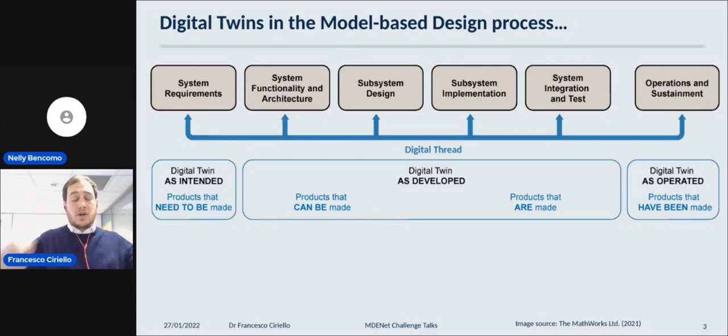The idea closely aligns to the sort of agile processes we're so familiar with for continuous improvement, which are commonplace in software engineering. What we were really keen on was stressing that operating digital twins in the field was the key mechanism to close the feedback loop between product cycles. So nothing too new about the philosophy here, but this is the framework we use to propose value for digital twins.

Once we had established a common grounding on the traditional view of model-driven engineering, we sought to map out opportunity areas for different emerging technologies. We started by examining the role of artificial intelligence at different stages of MBD, starting from the left-hand side, looking at unsupervised methods to mine data from previous life cycles of digital twins, and perhaps improve requirements and system architectures from this feedback.

We then moved towards the middle, looking at how AI can support data-driven modeling for SysID, for surrogate models and ROMs. We tried to get some of our learners to pick up basic skills that would support some of these workflows. Finally, we discussed how to use AI in operations in the deployment of AI-based listeners, for example in anomaly detection applications, or as agents for optimizing decision-making systems.

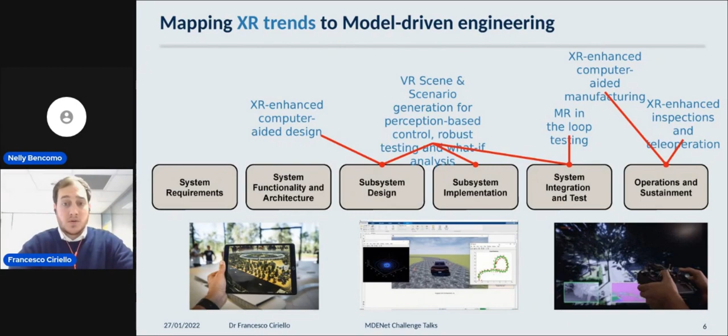So we created a case study to try and convey the roles of all these technologies in the course, and we tried to create practical components inside it too, that looked at multiple aspects of an enhanced MBD workflow. We examined how a team of engineers might design and operate a fleet of package delivery drones, which offered a good framework to develop simulation-driven algorithms for both design and operations.

Looking at motors, looking at battery health, looking at how to simulate faults in the copters, and even how to run reduced order models, say, for the aerodynamics of flight.

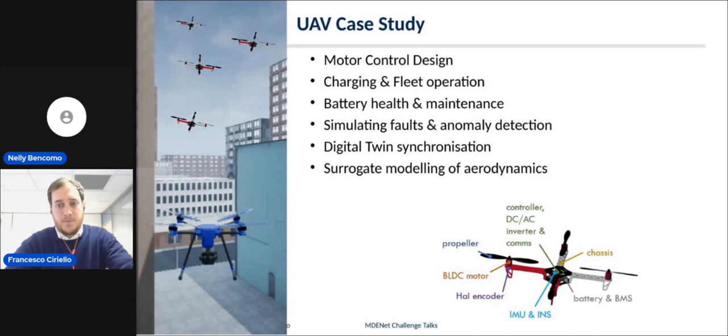We organized the case study by first exploring traditional themes in model-driven engineering. On the top line, you can see how we started looking at design of experiments, reusing models for operational decision-making, and also some techniques showing how to synchronize a digital twin model by assessing the condition of an asset from streaming data. These are really cornerstones of digital twin practice that we wanted our learners to get some practice with.

We then moved on to show how the boundaries between model and physical asset fade in a sort of modern DevOps. We looked at how to use simulation to generate edge cases, for example motor faults, and use data to improve or generate models through system identification or parameter estimation techniques.

In the second day of the course, we started looking at emerging technologies, starting from AI and delving deeper into data-driven modeling, then looking at how AI can be used in decision-making systems—that's the operational intelligence on the slide. But for the final part of the course, we focus on building interfaces and engineering use cases for XR software. So for the rest of the talk, I'll focus on these technologies, as they are less commonly explored in engineering practice.

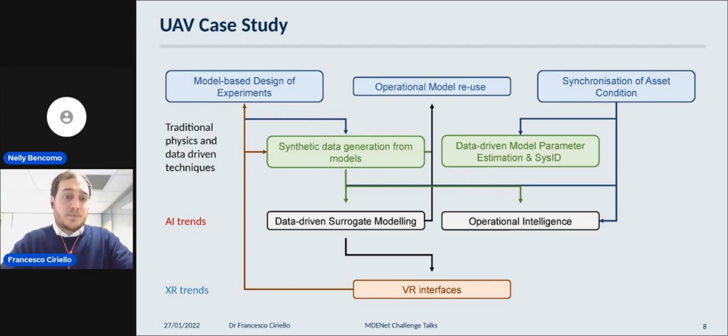The main tension that became apparent as we started delivering the course was that we typically model systems with a whole spectrum of fidelity. On one end, we were developing simulations in engineering IDEs like MATLAB and Simulink to show some of the workflows. On the other end, we also wanted to deploy some of those simulations into platforms such as Unity and Unreal to take advantage of a wealth of features that come with photorealistic simulators.

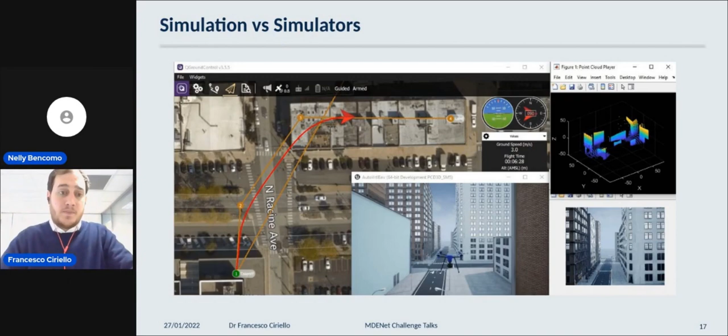This is an interesting schematic that resulted from our attempts to first explain game engine technology to engineers, and then map it to model-based engineering workflows. If a game developer designs a new virtual world, they'll first build their players and environment as objects in a gaming engine. On top of that, they define dynamic elements such as skeletons or articulations to start modeling the interactions between them. These filter through a series of animations, kinematic or dynamic models, or event triggers to create richer interactions between the virtual world and the actors or players, which are rendered through some kind of engine.

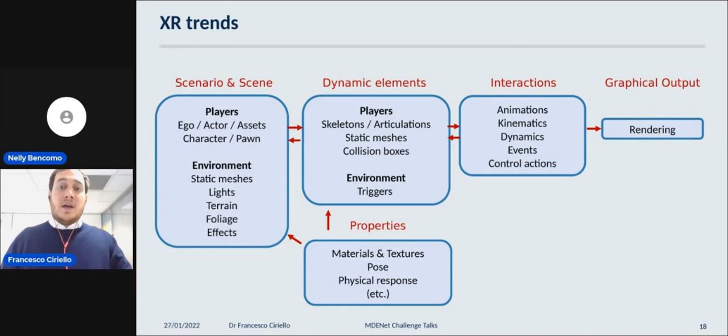Now we're seeing more engineers practice similar workflows. This is how we try to map these elements into the engineering world, starting from the creation of assets in CAD, where we might build actors—CAD models of, say, pumps, cars, drones, and so on. These actors are built into assemblies, typically in some proprietary language within a CAD package that defines the joints and their relative positions. Then we have to import these into a gaming engine with tools like Unreal Datasmith or Unity Pixyz.

These scenarios and physics would be primarily driven by simulations. So we had to think about how to build interfaces between realistic physical simulations and these XR technologies, which have much faster physics but lower fidelity.

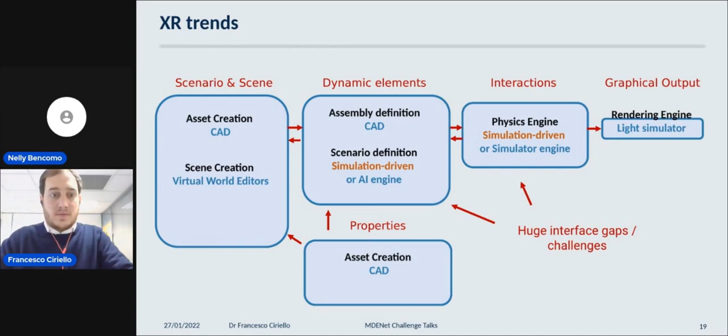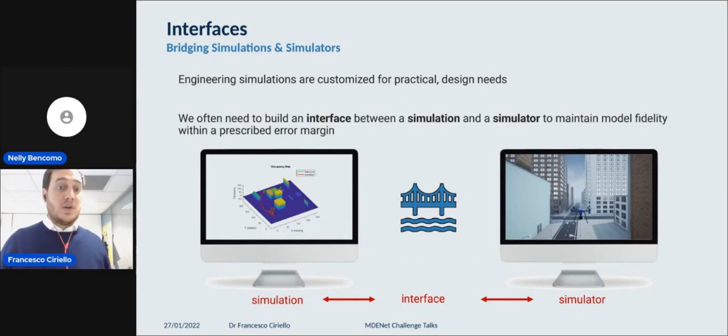This was definitely the main challenge for the course. We tried to summarize a basic definition for an interface between a simulation and a simulator. We also tried to define different types of workflows common among engineers, which we named playback, co-simulation, and standalone deployment.

I'll go through these quickly before I wrap up. A typical workflow an engineer might use—say if they're designing a drone—is to first record the output of a simulation developed in a design tool, then play it back into a gaming engine. For example, they might want to display the path a drone has taken in a virtual world, and by processing it through that virtual world, they can collect sensor data like images or LiDAR data, which they can then reanalyze in a design tool.

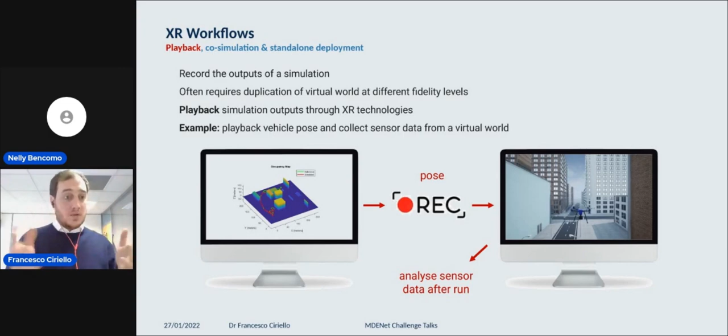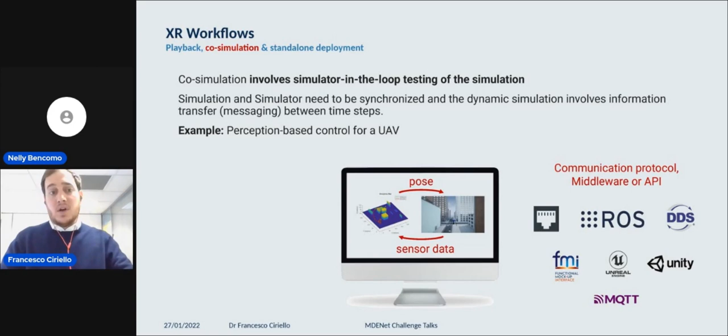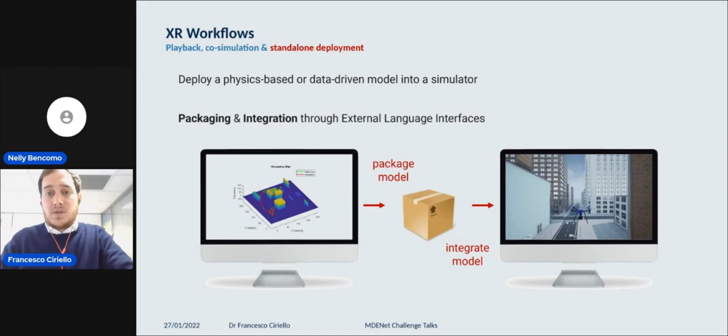So that's what we covered. We started this brand new course and were quite ambitious, really trying to map these emerging technologies in engineering practice, covering a whole breadth of technologies. I can see Stefan's question about this being a lot of content covered in 2 days—we just tried to give a flavor of all these technologies. The whole course was 6 days, but some of the content we looked at here was covered in 2 days.

One of the major challenges, which will come as no surprise, was how to build interfaces between simulations and simulators, not even getting to the idea of synchronization between the two, which becomes even more challenging when building live interfaces. We welcome feedback on the course structure and these reflections. The course will run again—this was the first time we ran it, so some of this was new to us as well. I hope you enjoyed the presentation.